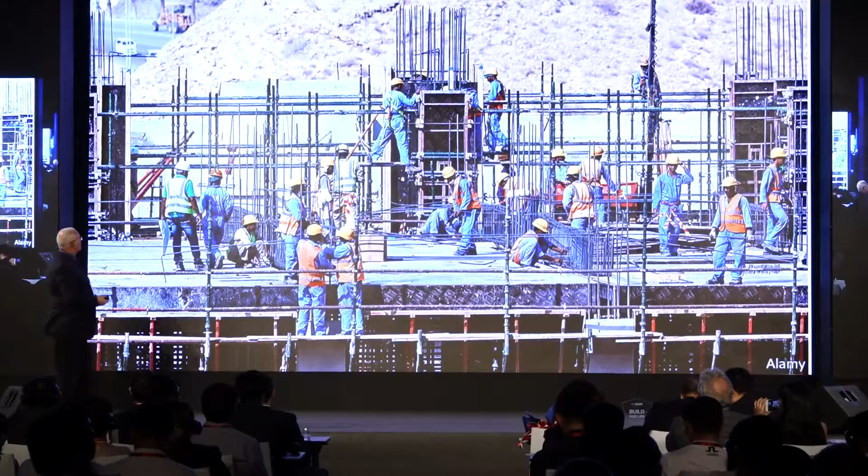I'm hoping everybody in the room recognizes this picture. If you don't, I'm going to share with you that this is a typical construction site. And what do we see? We do see 25, 30 people, a lot of steel reinforcement, a lot of materials from the excavation behind, and in our view, a lot of inefficiencies. And I'm going to go back and forth between this picture, but I'm going to show you this picture with a graph associated with it.

McKinsey Global Institute, the smart guys analyzing global trends, have looked at the gross value added for one man-hour that is created in different industries and in different sectors of the economy. And if you look at the graph, agriculture, if you take 1947, that's $100 of value added created for each hour worked. It's been sitting at about 100. And over the following 60 to 70 years, agriculture has been able to improve the gross value added to $1,600 per man-hour. Other industries like retail and manufacturing have been able to increase that by 800%.

And if you look at the construction industry, after some gains in the 60s, in the 70s, as buildings have become more complex and more individual, and the architects and engineers have designed more complicated, unique structures, it's going back to 100. And it's certainly a great opportunity to change that and create more value for each hour worked. With the global trends of smart cities, Industry 4.0, the demographics, the labor shortages, the total cost of building something has increased. And the technology of concrete 3D printing has the ability to do so.

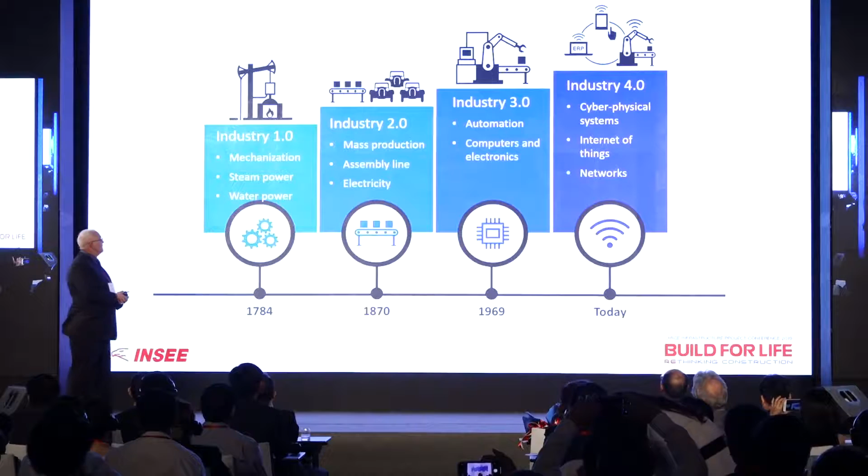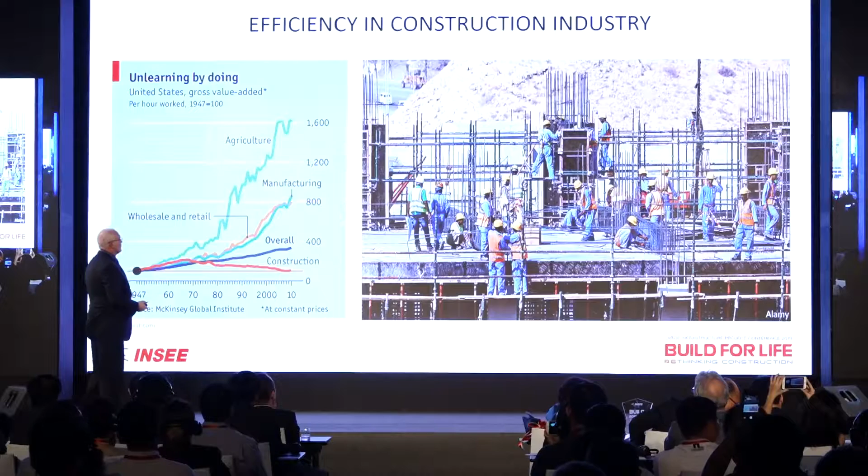You know this, I think you've seen it many, many times, and you know what they are, you know what is expected, and if I go back to this picture, it's hard to find anything related to Industry 4.0, and it's difficult to find much related to Industry 3.0. So again, a great opportunity to make a change and bring the construction industry into the 21st century. We know what happens if you don't change. You know what happens if you don't innovate. I believe everybody knows those companies that kind of disappeared because they didn't innovate, although they made an extremely good, extremely popular product. But newer technologies came in and they went away.

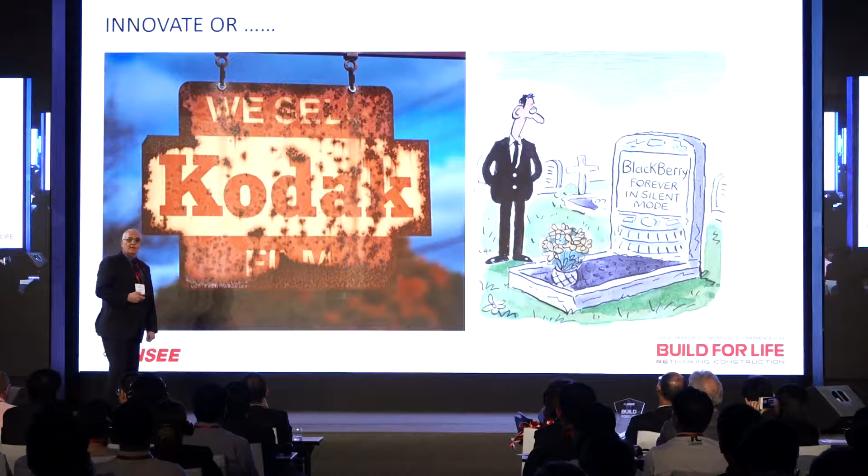I'm showing a couple of structures that have been built using concrete 3D printing. Those structures are today in use, and it shows, on a small scale yet, the viability and the possibilities that can be done with concrete 3D printing in housing, different structures, and obviously fancy structures. This is not as impressive as the Gothic cathedrals in Europe, but they do have the capability of going there.

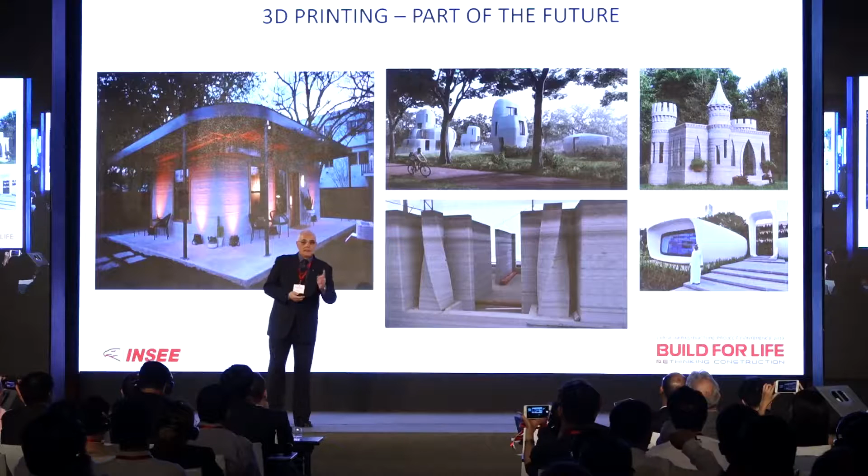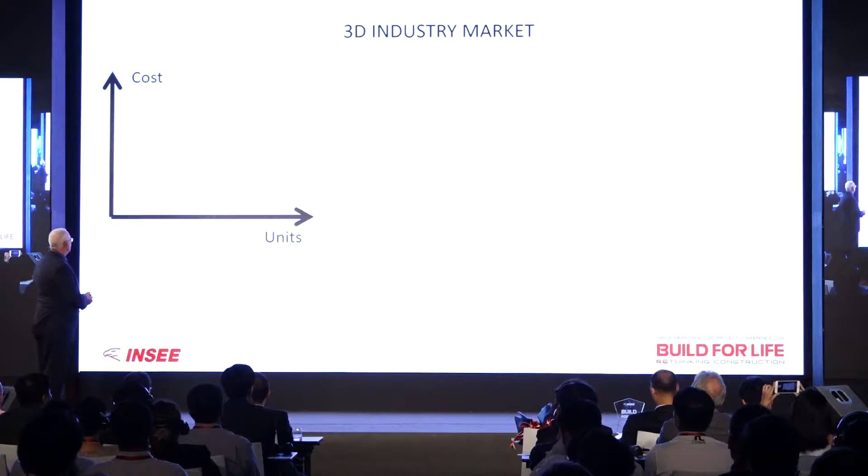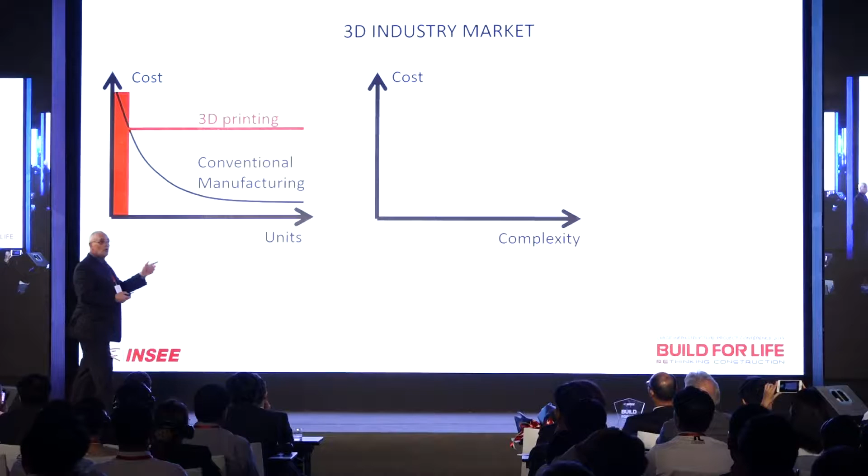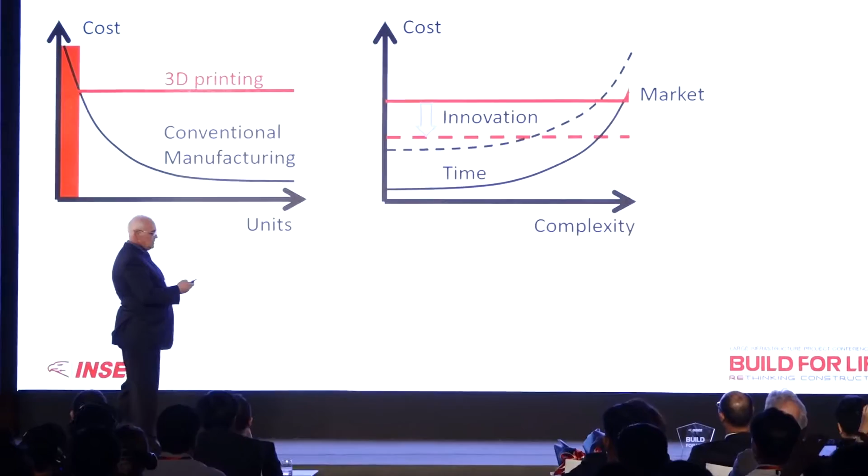I'm going to bore you with some facts and figures. I'm going to go quickly past that. My time is limited, and I'm just going to show you where concrete 3D printing is today. And obviously, this is not a technology for mass manufacturing. Obviously, with large mass manufacturing, the more units you produce, the unit costs go down. And in the case of 3D printing, it's usually constant. But if you look at cost versus complexity, this changes a little bit. And if you take into consideration all the factors, such as time and additional innovation, the market for 3D printing becomes viable and it becomes quite large.

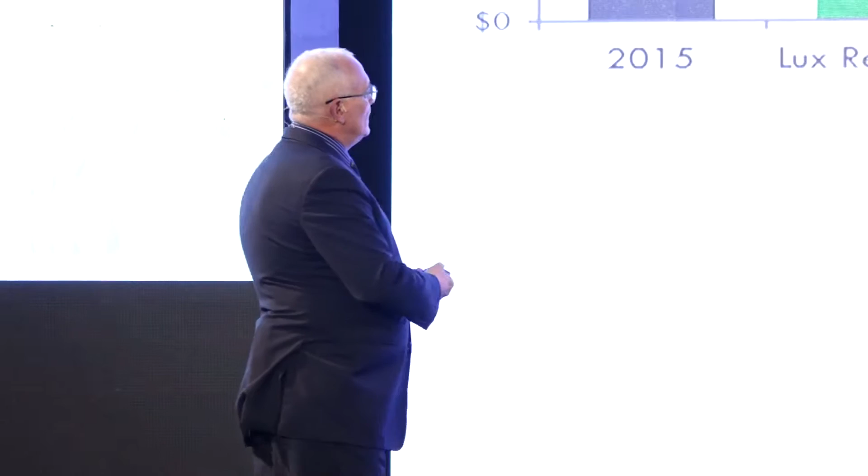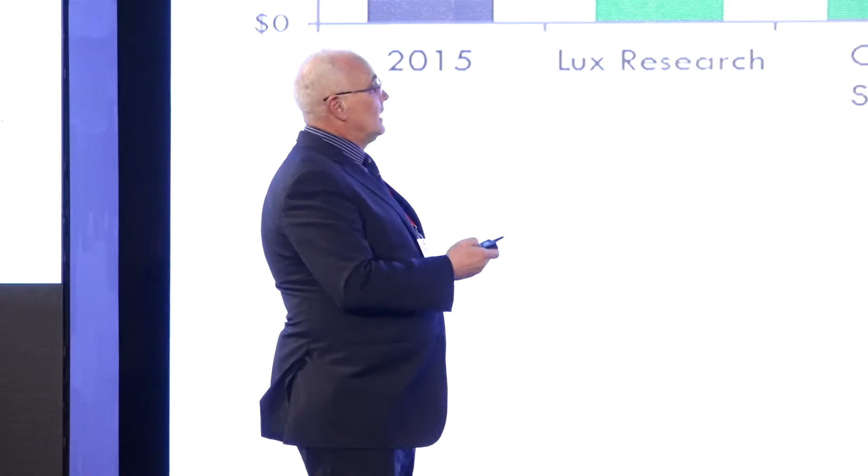Smart guys, Credit Suisse, McKinsey, Morgan Stanley, have been looking at 3D printing, not concrete 3D printing, but 3D printing in general. And they came up with a number, $5.2 billion in 2015. And depending on who you talk to, by 2020 it could be 41 billion, 21 billion, and somewhere in between, with McKinsey saying that by 2025, which is not too far from now, time flies, it can be somewhere between 200 billion and 500 billion. No matter what number you pick, this is a significant market, this is a growing market.

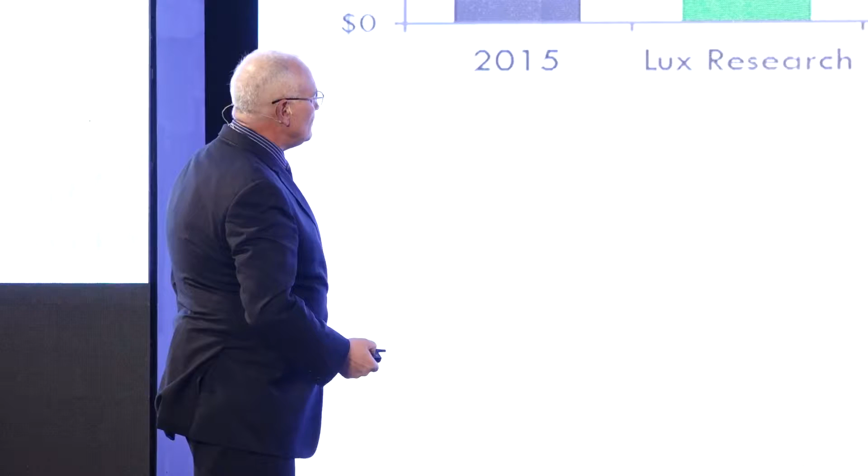And if you look below, this industry is already disrupting the prototype industry at a value of 12.5 billion, and it started in the 80s. And then molds and tools in the 90s is still a small penetration.

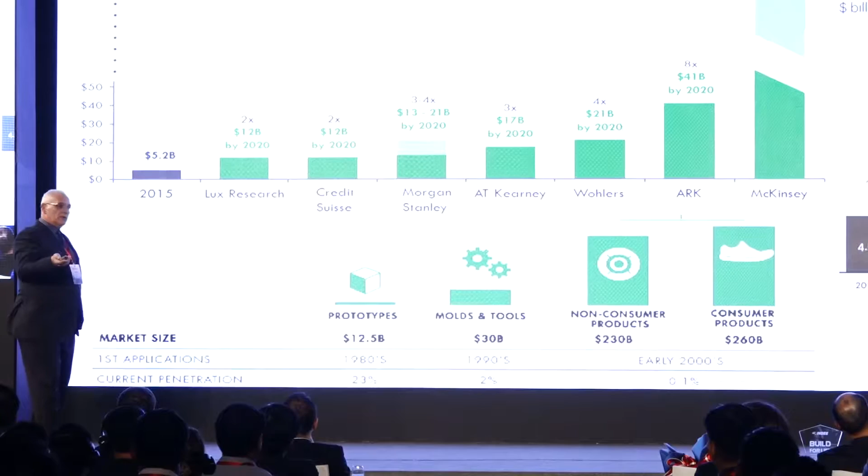This is where concrete 3D printing is, along with other applications in non-consumer and consumer goods that will be able to be 3D printed and customized. If you look at our customers today in construction, customization is the key to success. Different customers want individual solutions. One solution is not always acceptable or sufficient for the entire market, and concrete 3D printing allows operators to do just that: customized solutions for their customers.

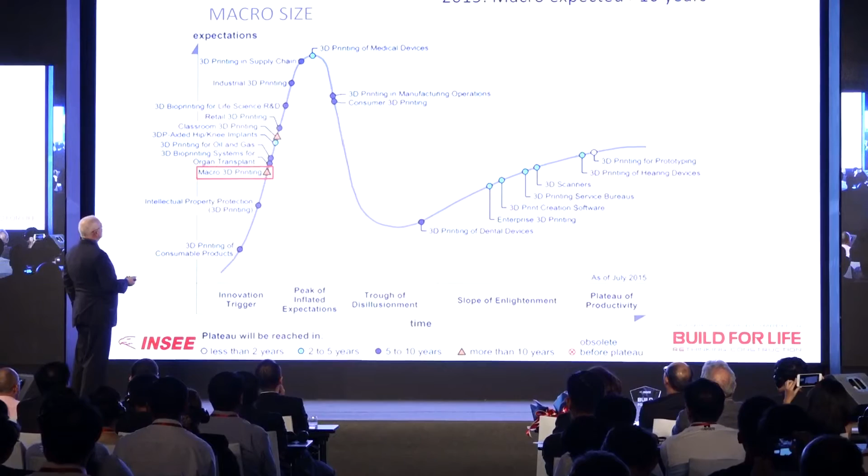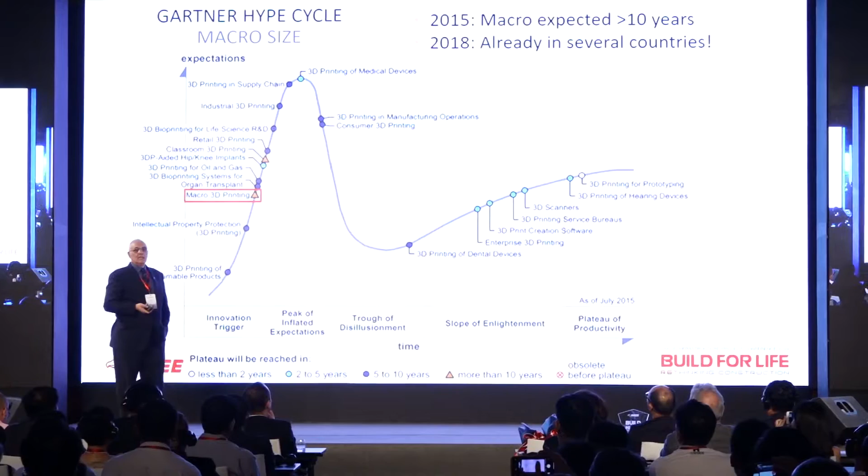The projections were that macro 3D printing was expected in more than 10 years from 2015, but in 2018 the concrete 3D printing technology is already operating and working in several countries in Europe, the United States, and Asia.

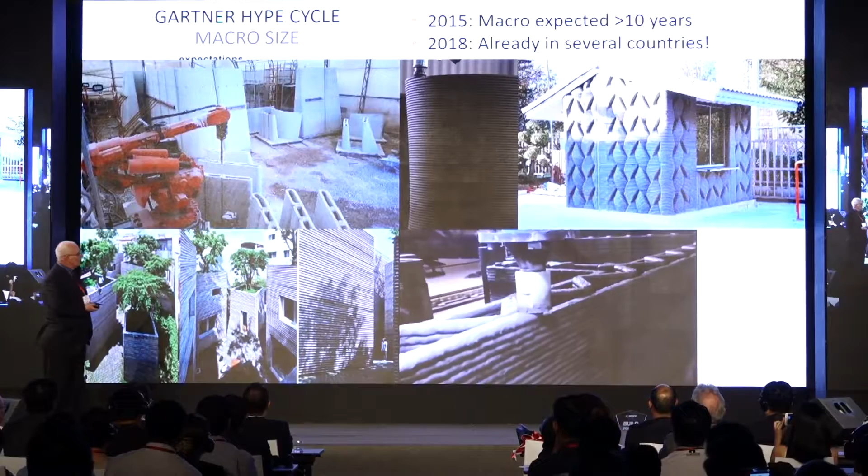I'm going to put some pictures up and let the video run. Ladies and gentlemen, this is where the magic happens. This is the printer head, and what you see here is the printer ink. I'll let it run and explain more. The key to this technology is the design of the printer head and, most importantly, the material.

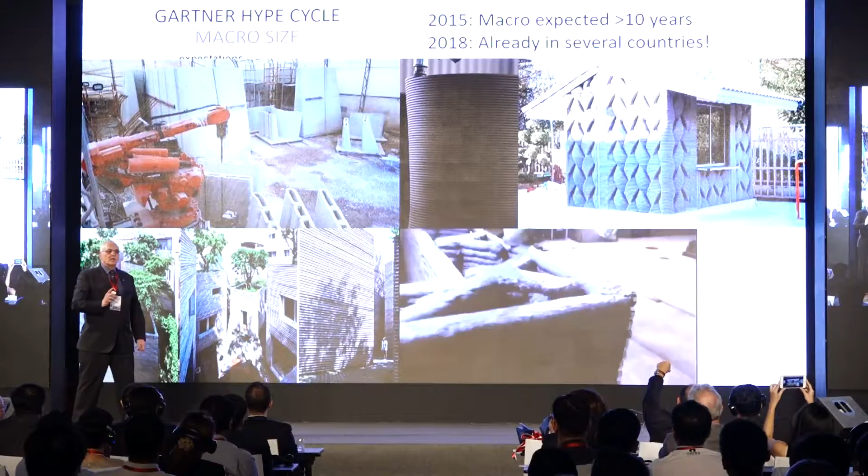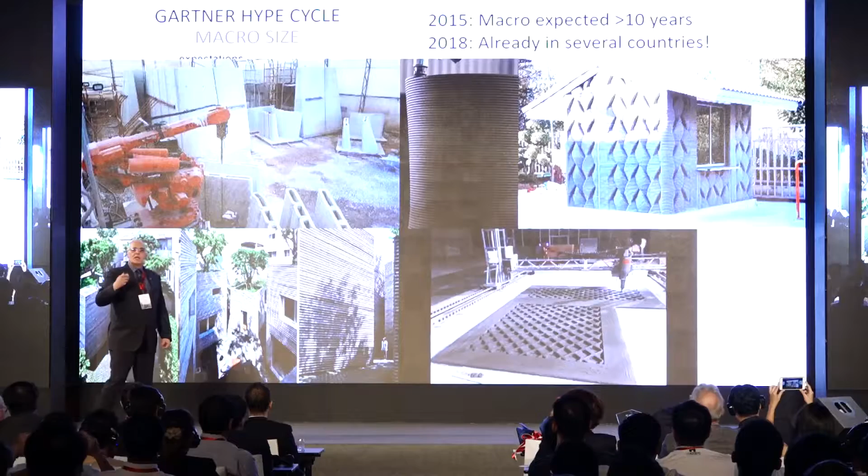The mix design and the design of the concrete 3D printing mortar is very precise. The other important factor is that it's done in a controlled environment, not on site. This is done in a factory setting, in a controlled environment. It doesn't matter what the weather or exterior conditions are — you can continue to produce and then install on site.

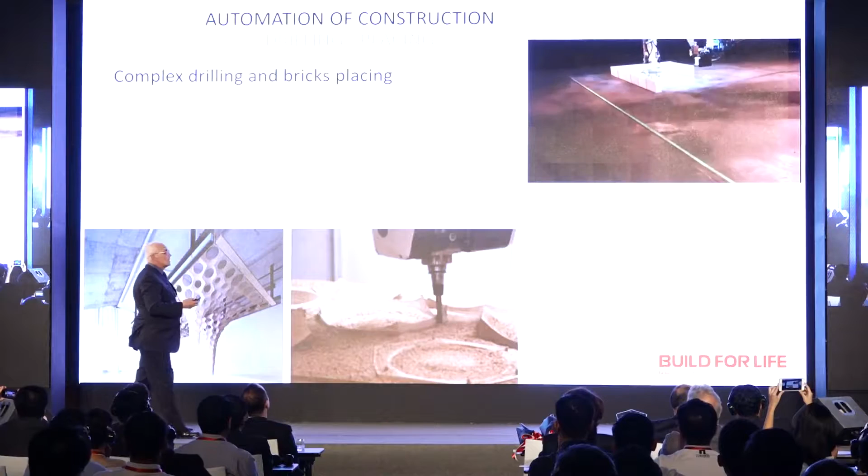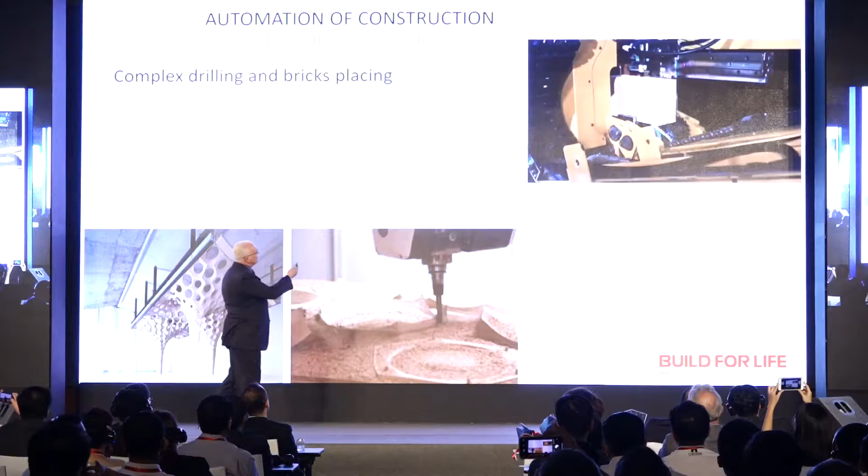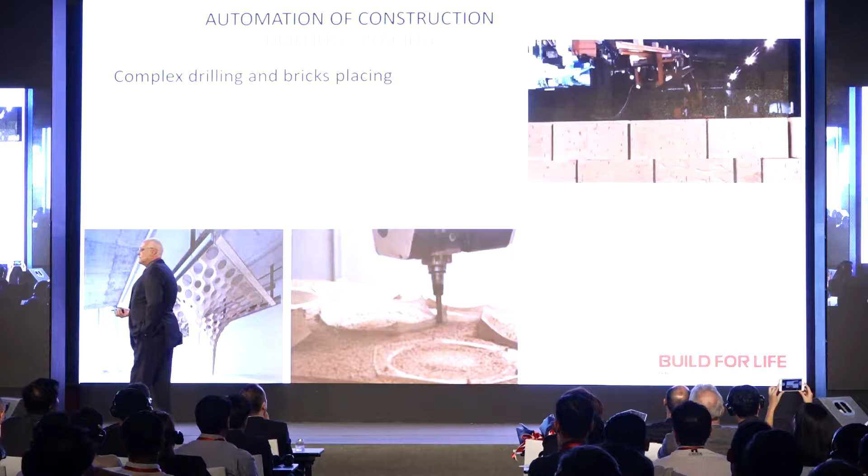There are other adjacent technologies to concrete 3D printing that are trying hard to automate production. This is a bricklaying machine — you can see the mortar or glue being applied and then placed. This is slow motion. It's really efficient in an area where qualified bricklayers are disappearing and really difficult to find, taking production that's normally outside in the elements into an industrial setting.

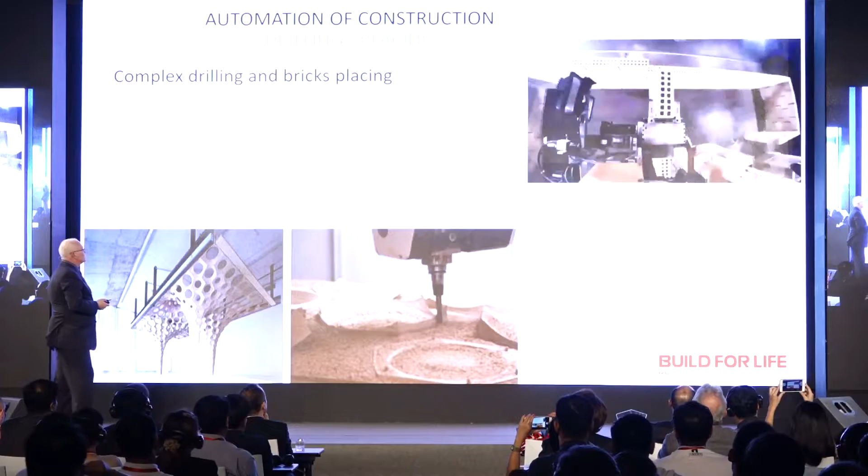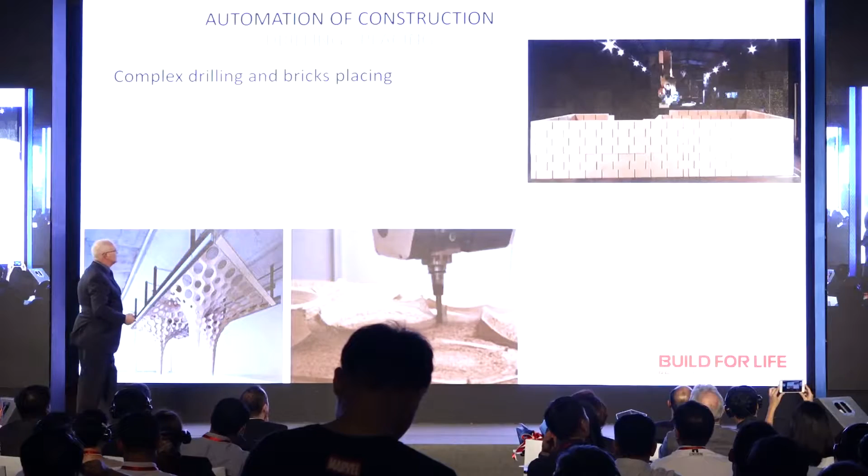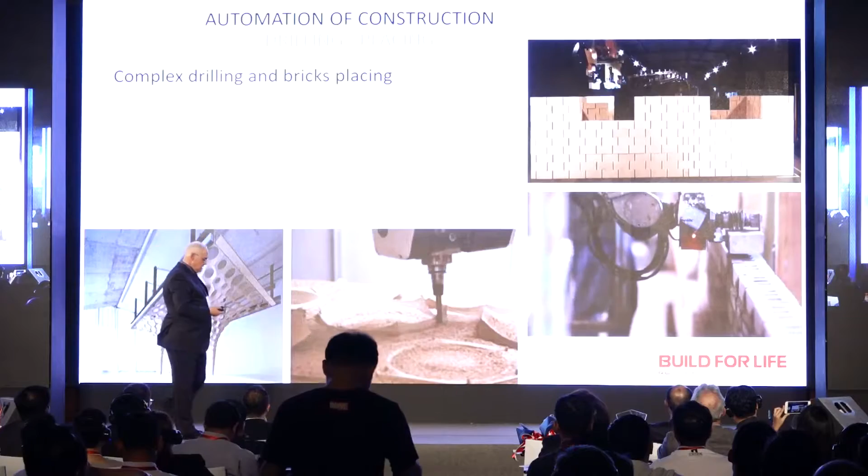I can let it run for a bit — you can see in 30 seconds how they do a window. Although my time is running out, I think you get the idea. If you're interested, I can send you this presentation, and I'll be happy to answer more questions at the end. This is how the mortar is applied, and this is how the brick is done — again, it's the drive for industrializing the construction process.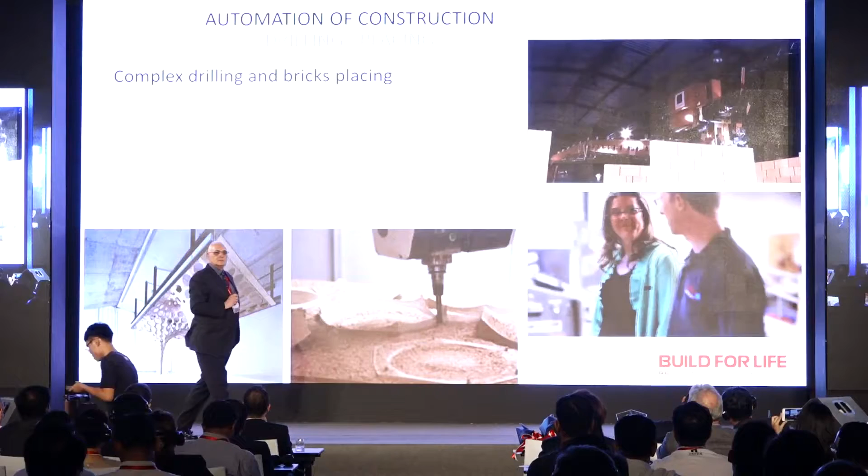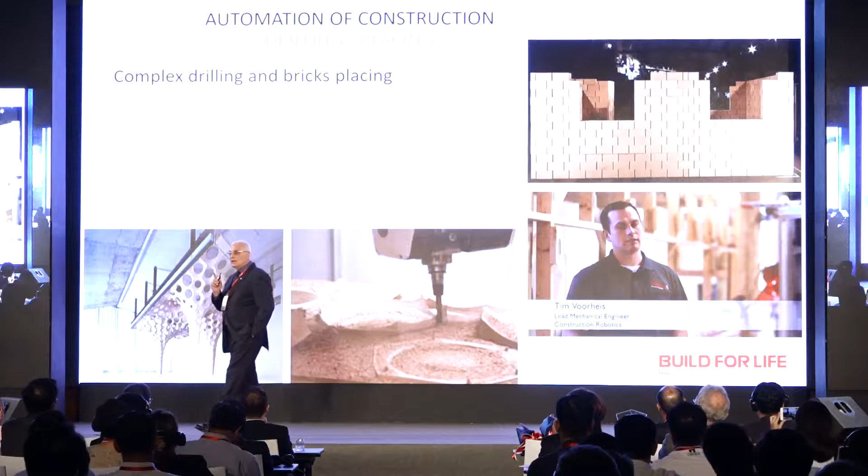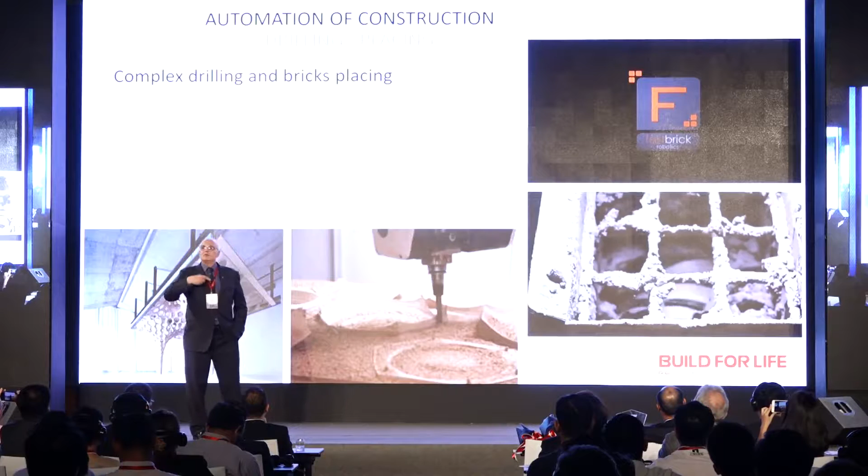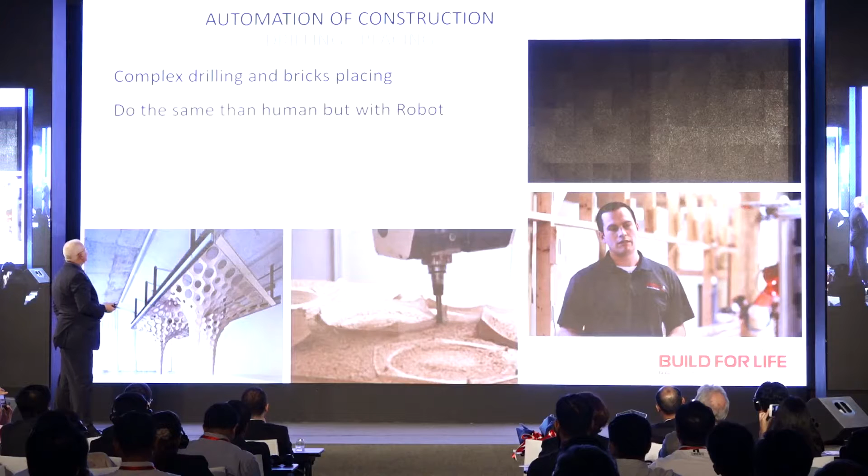I heard a couple of weeks back that an interesting company is getting into the construction business — do you know who that is? Toyota. In Japan, apparently there's legislation that the majority of construction will have to be done in a controlled industrial setting — modular, with 95% of construction done through modular construction. Toyota is taking their competencies into efficiencies and the manufacturing process to start building homes, units, and hotels, helped by the development of these technologies.

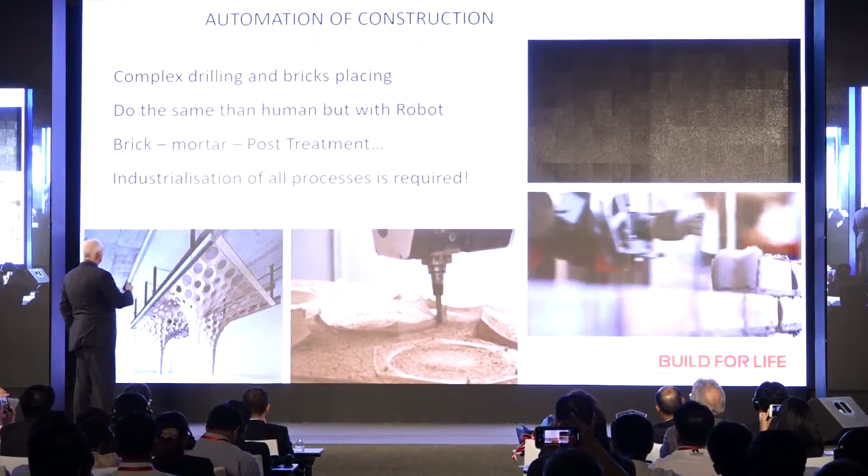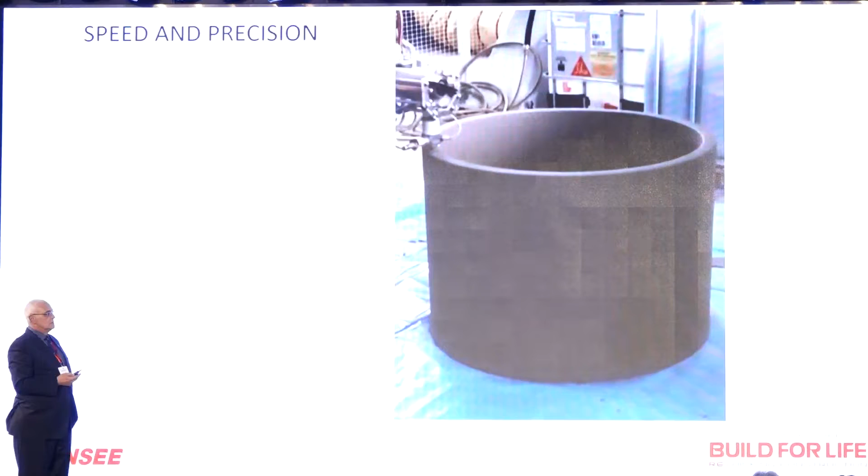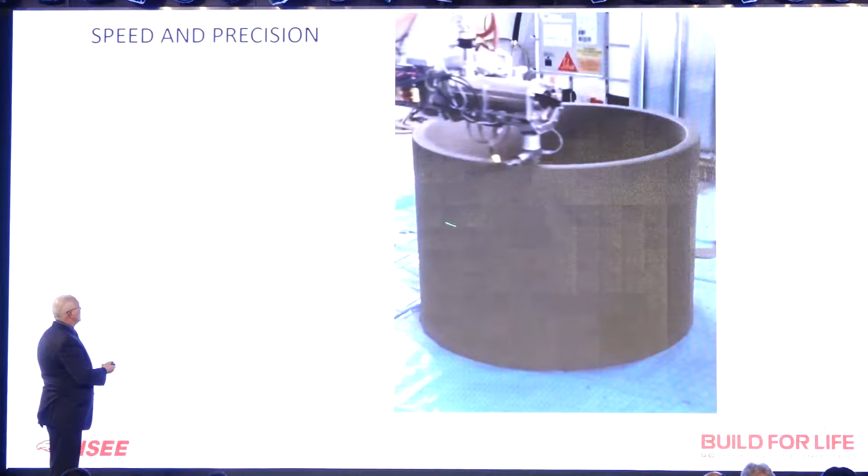I'm going quickly over that, and I hope the main idea remains that industrialization of all processes is required. This is again a short video on how units, no matter what shape they're in, are built using concrete 3D printing technology. Again, the magic is in the head, in the production, and this is actually the printer.

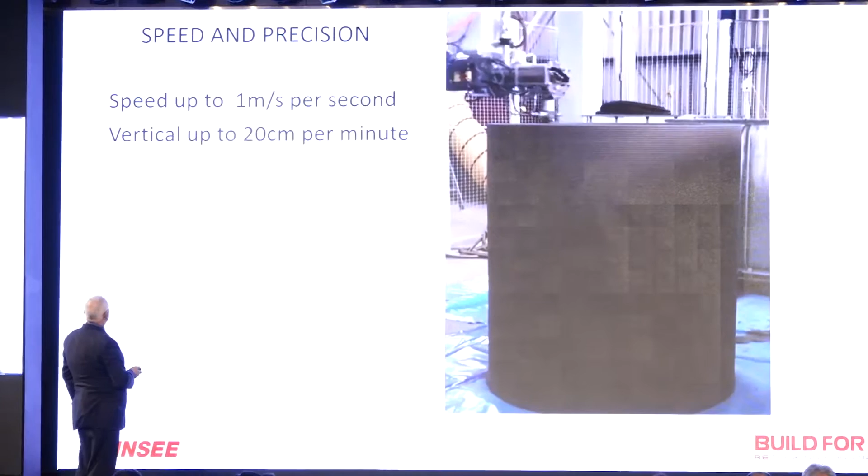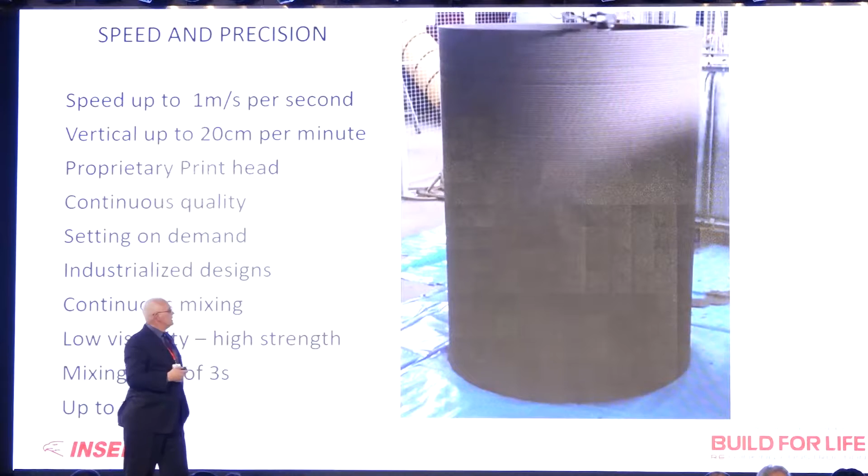Right now there are printers with diameters of over 5 meters, giving a lot of flexibility in what can be built — what segments, structures, and elements. The speed is increasing too: 1 meter per second, vertical up to 20 centimeters per minute. There are more proprietary print heads — there's a race, with a lot of companies developing these print heads and printing mortars.

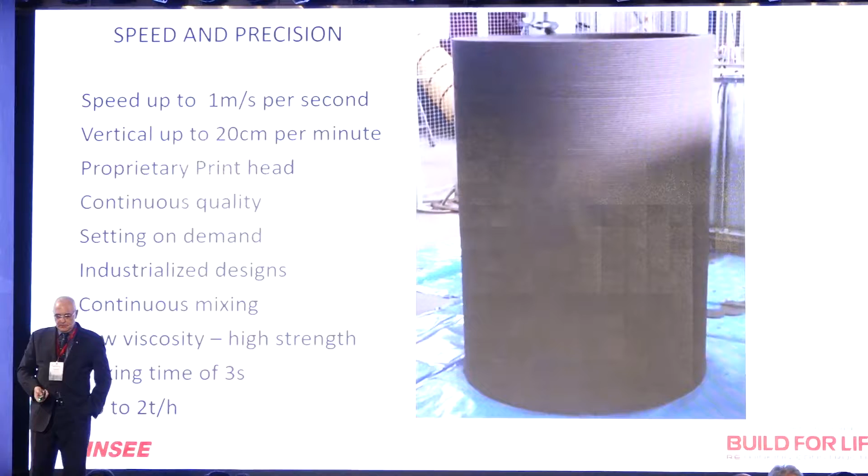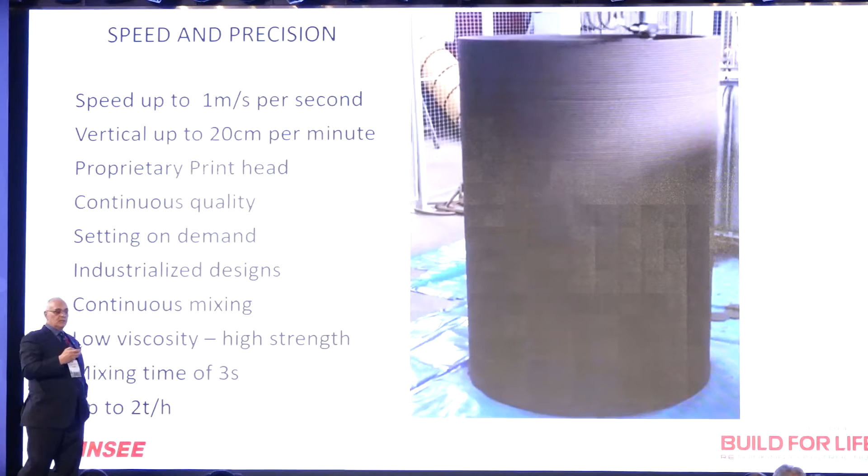What the technology offers, and what's important, is continuous quality — better to look at that than deal with my rambling. Setting on demand, industrialized design, continuous mixing, low viscosity mortars, and the ability to place up to 2 tons an hour in this setting.

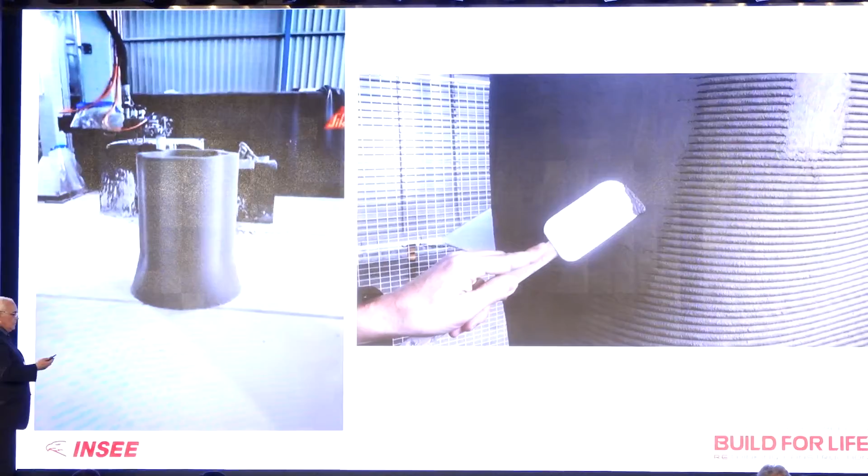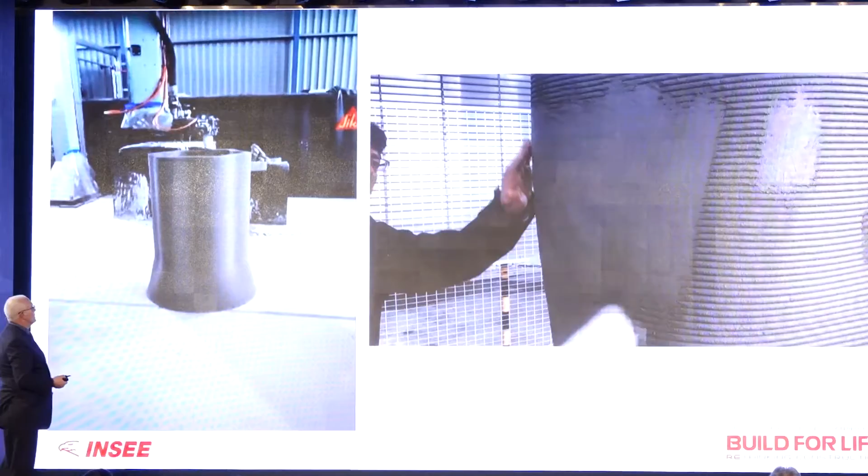More videos, keeping it light. So I wanted to show how easy it is to change the finish, to choose your finish. If you choose, you can do any type of finish. This is the spatula that I turn my eggs over with, so it doesn't need a specialized tool to do so. Those are some of my colleagues in Europe.

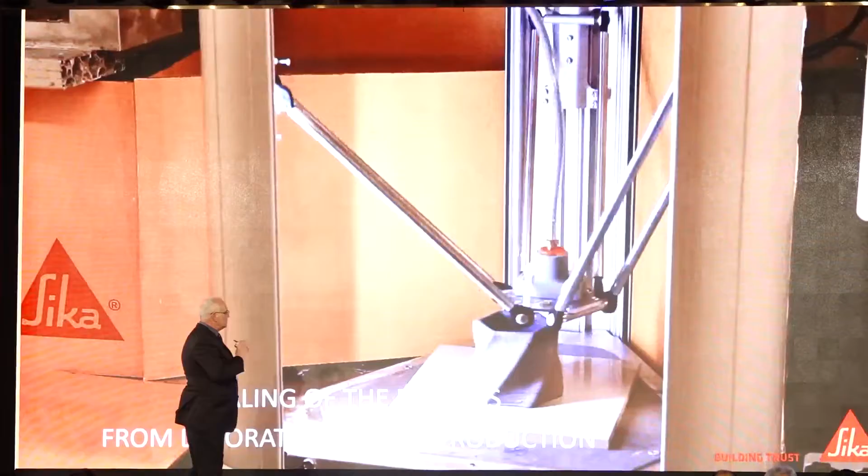Where does everything start? It starts in the lab. We can take the element and do a lab trial at a 1 to 10, 1 to 100, or 1 to 50 scale to validate its structural integrity. And then we can take this process and scale it up to the real sizes quite easily. The ability to test your ideas at a small scale, seeing what it is, and then go big, is really important.

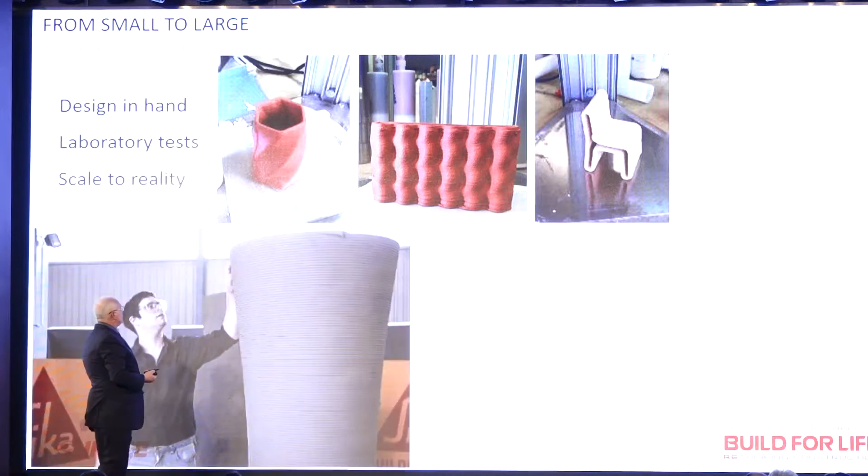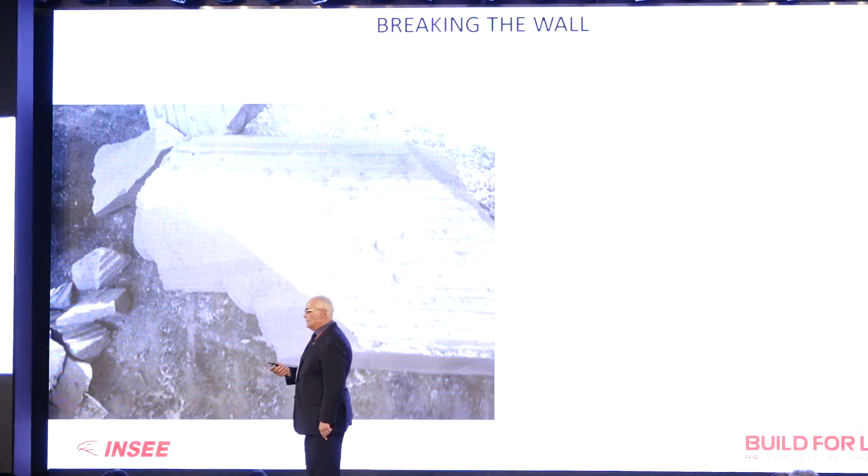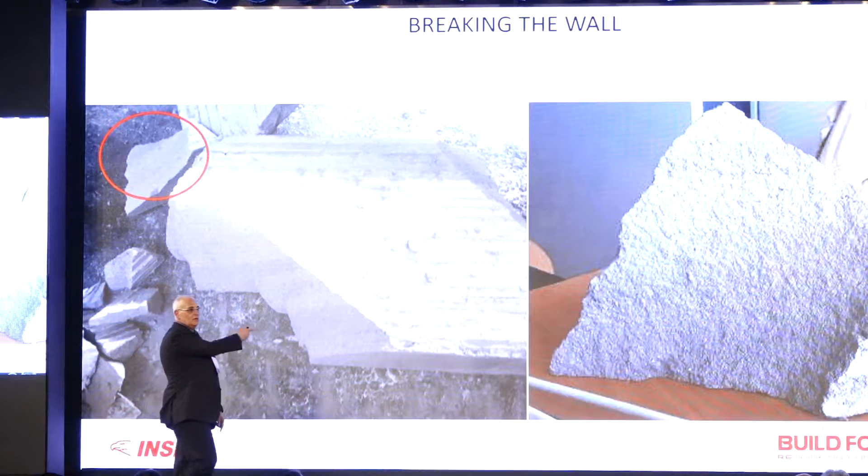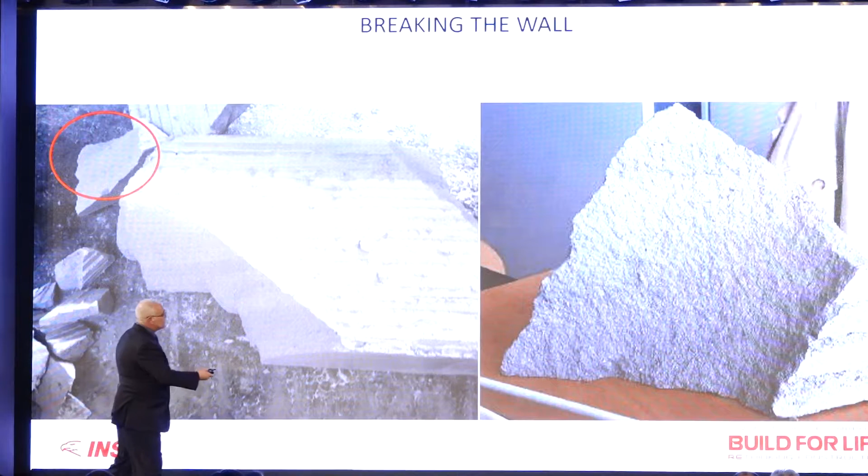So you take the design, you scale it up, and it's easy to go big from small. Now, those couple of slides get me really, really excited. I'm sure you guys get excited over different things, but I get excited over that, and I'll tell you why. We broke a piece out of here, and I want to show you the piece. Now look at that. No layers, consistency, strength throughout. Although you see the layers here a little bit, look at the concrete mass.

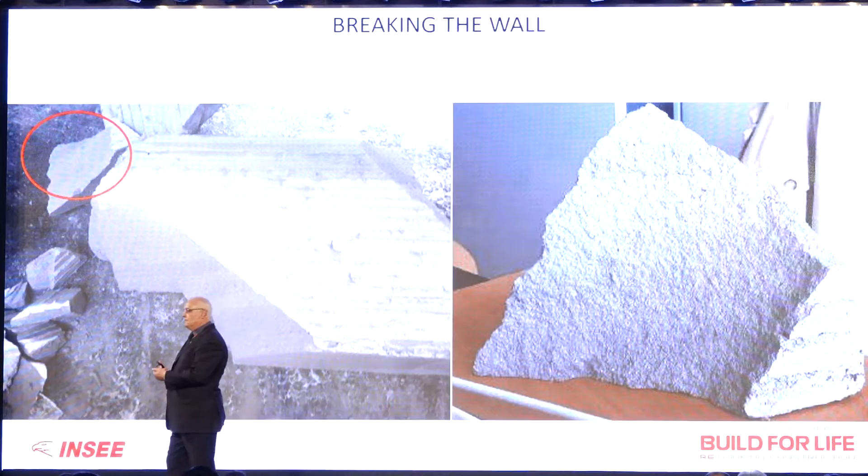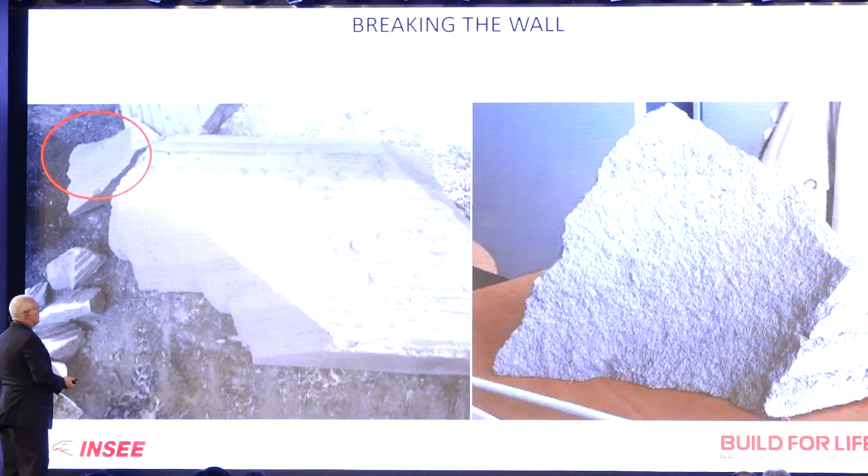And I'm going to challenge you to take any cast-in-place, cast-on-site concrete, break it up and make it look like this. The difference in vibration, in the slump of the concrete, in temperature and casting conditions are really not conducive to getting anything like that. Please allow me that. I'm an old concrete head, so I gotta do that. Perfect binding and a great structure.

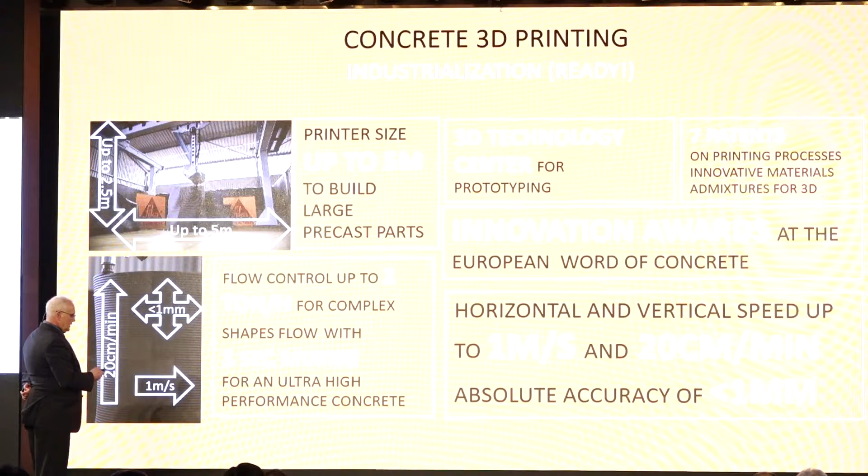So what is available today? This is a Sika slide. I didn't mean to turn this into an infomercial, but up to 5 meters, allowing you to build quite complex structures. A number of patents have been done. 2 tons an hour, fast setting, and really an efficient way to build anything that you want to build.

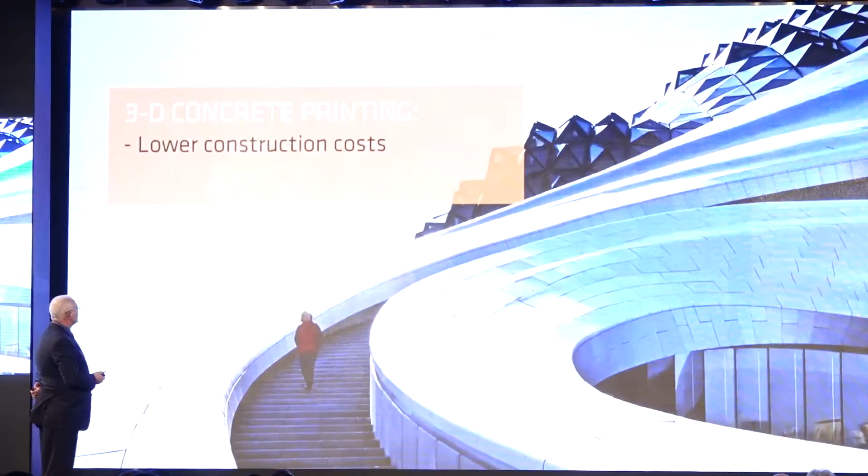So you've seen this video running outside on our monitors, and I will let it run for a couple of seconds because I still have 1 minute and 59 seconds remaining, just to show some things that can be done. Lower construction costs. Obviously, the ability to go into different markets. Precise modeling of elements. Industrialization.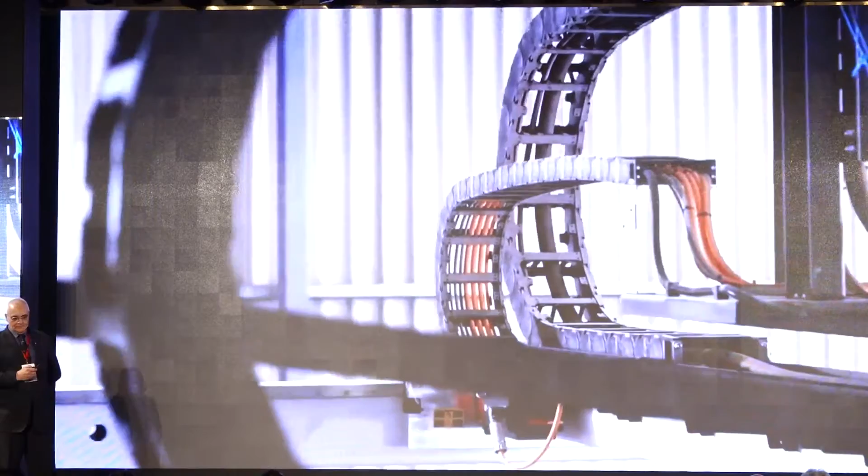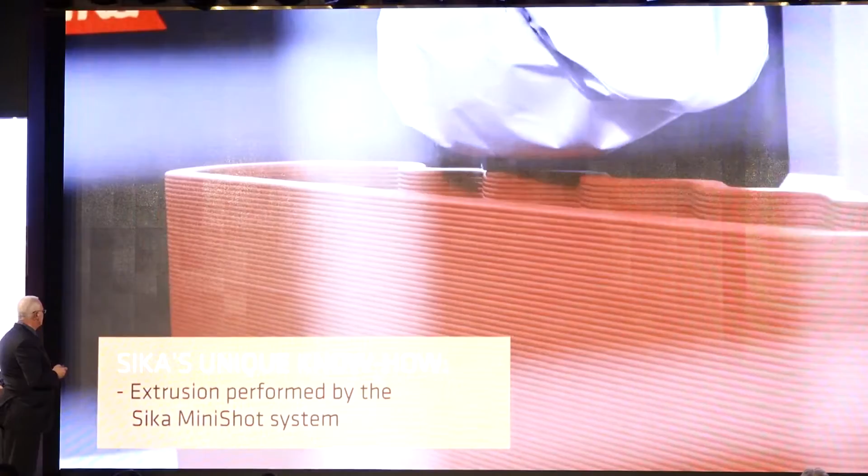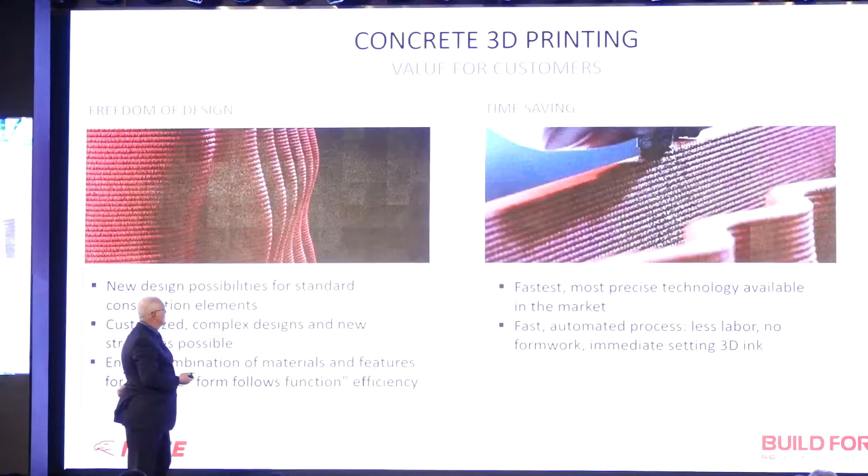Color on demand. You can make this any color you want. You can add fiber to it to prevent cracking and increase durability. And obviously all in a controlled, industrialized setting. And yes, we do have some know-how in making this happen. In the interest of time, I'm just going to move forward. I hope the idea is well recognized.

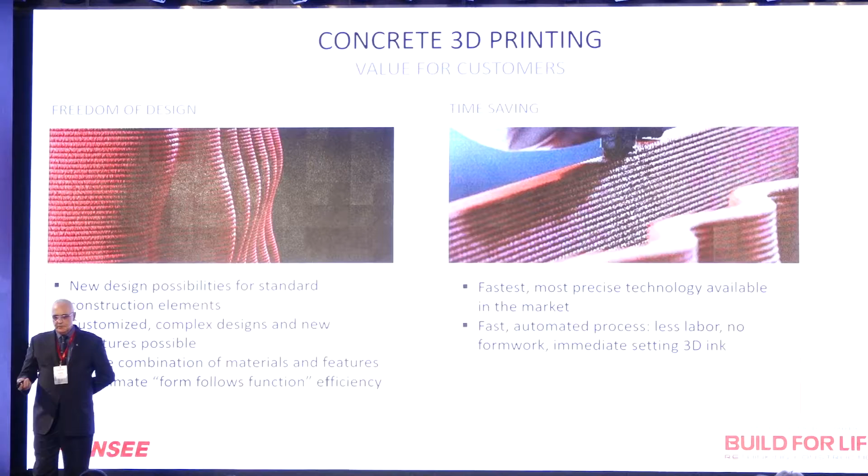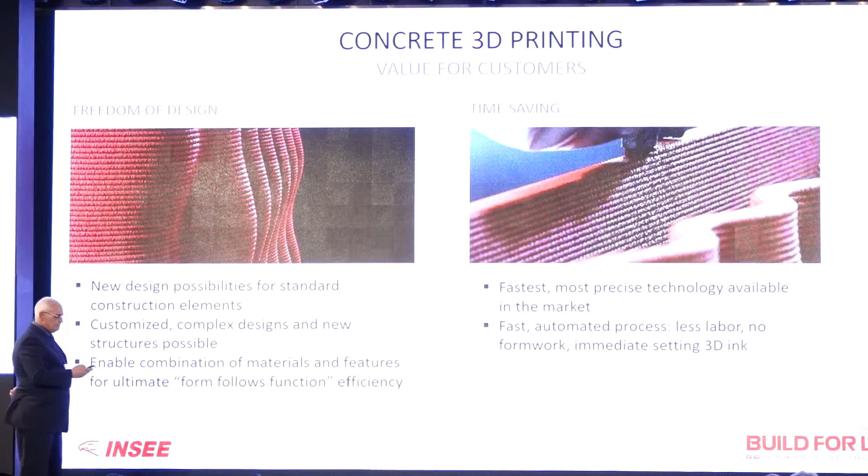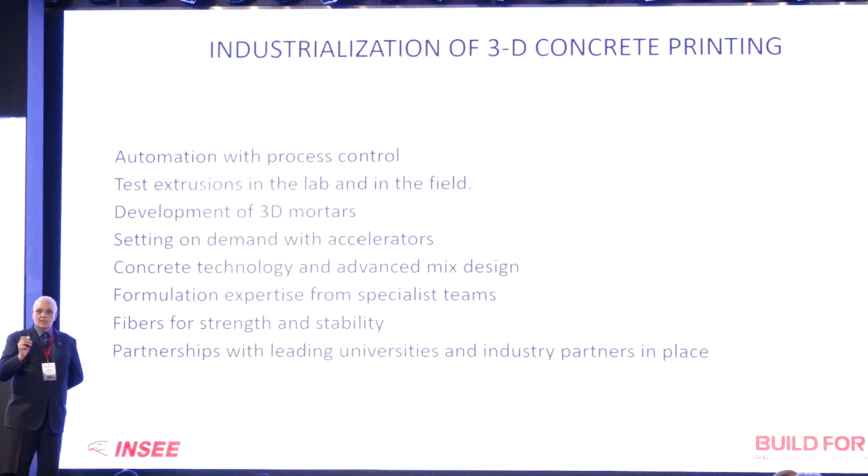So, if you look at the main elements, starting with freedom of design, the new design possibilities are there. You can customize, you can offer customized solutions to customers, and a lot of other benefits come with concrete 3D printing. The key, as I mentioned before and will mention again before ending my presentation, is that you can industrialize this process, taking it from the field into a factory setting with higher productivity, more consistency, and extremely high precision in the level of customization.

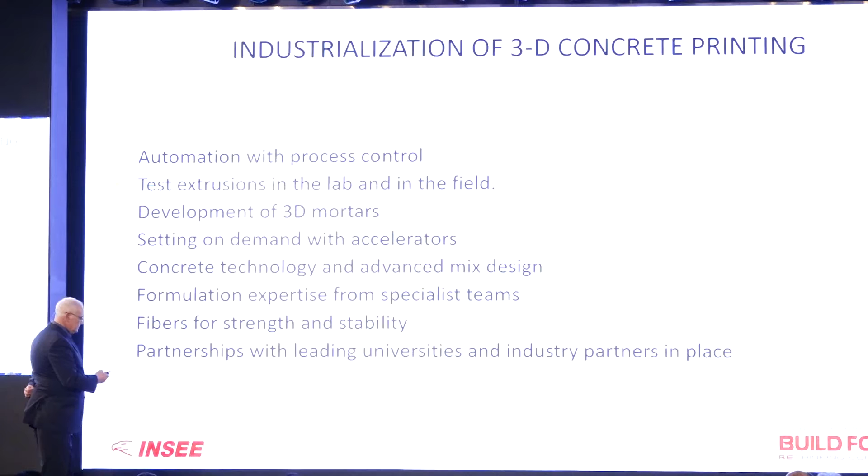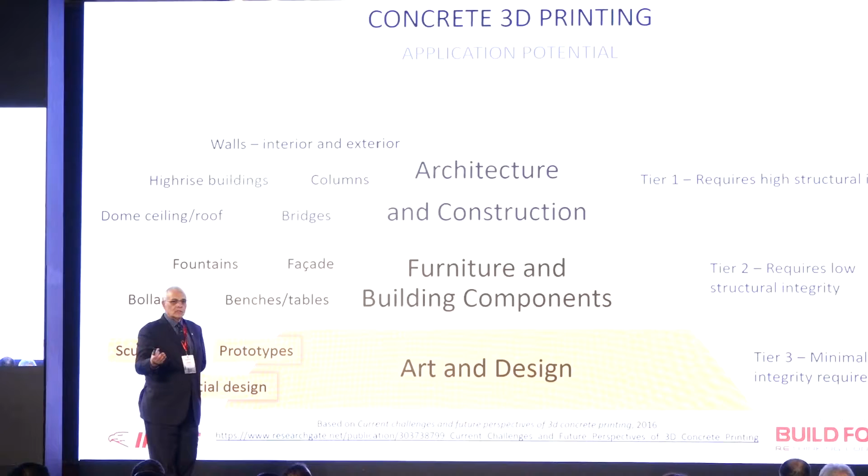Where it can apply: art and design, furniture and building components, architecture and construction. All these spheres require different inks, different 3D printing mortars. Obviously that's clear, but the possibilities and the applications are really endless.

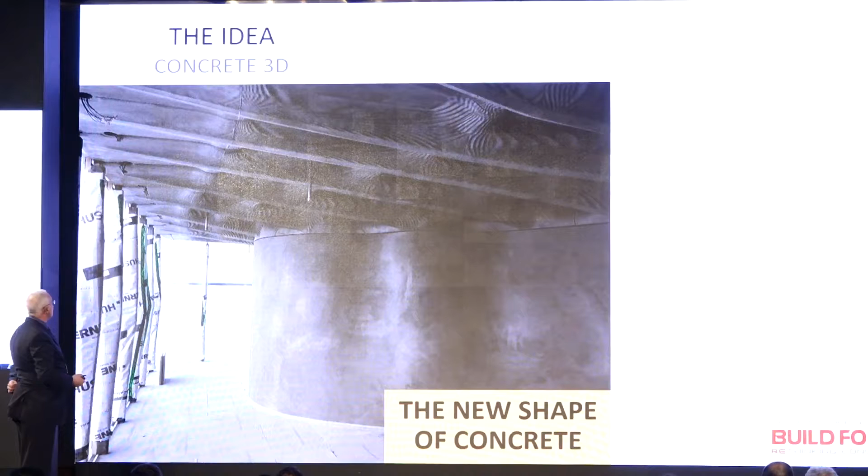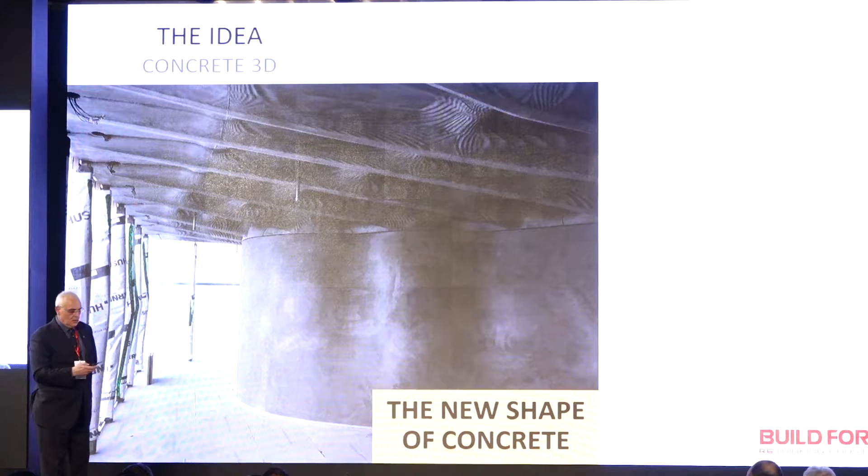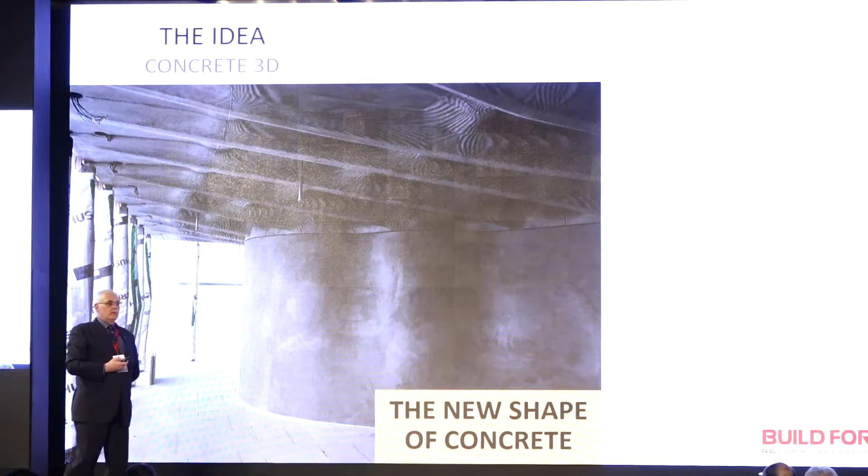The other thing that Philippe mentioned is how much concrete is being used in construction. If you look at it, this would be a ceiling made of concrete with a certain thickness. If you use 3D printed concrete elements, you really can reduce the weight and the amount of material being used if you don't have a load-bearing wall or a load-bearing roof. And you can see it a little bit here. It's beautiful.

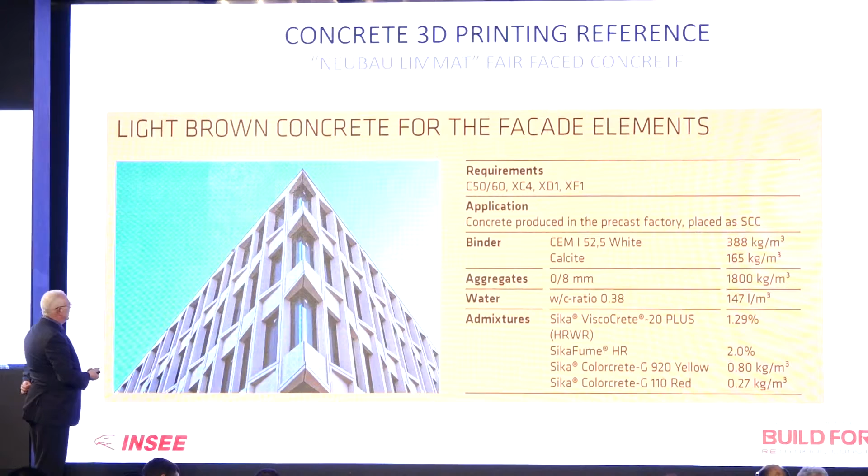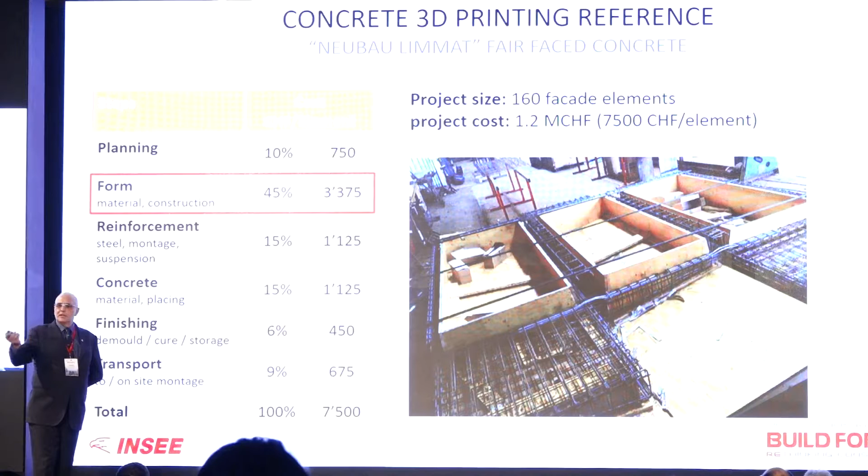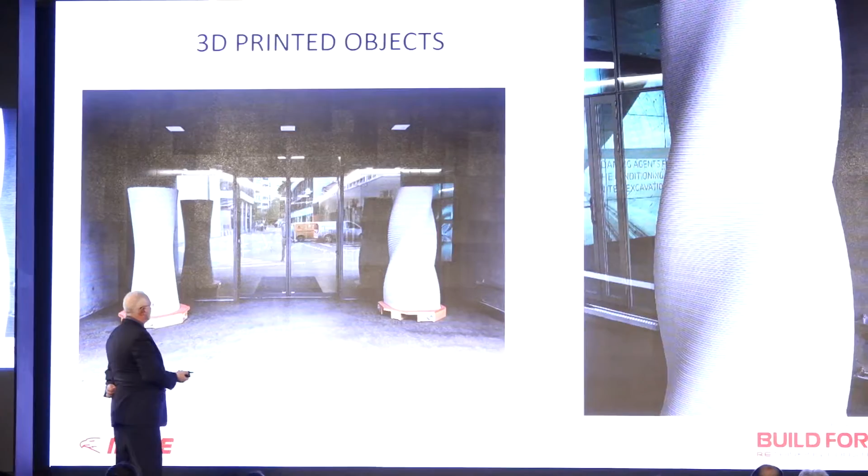This is a case study between 3D printing technology and casting some facade elements. I'm not going to go too much into that. Just to say that if you look at the total cost of an element, the forms are almost 45% of the cost. With 3D printing, that can be eliminated, and it's much easier and less costly. A couple of examples of 3D printed elements that have been done. This is in front of our research and development lab in Zurich, Switzerland.